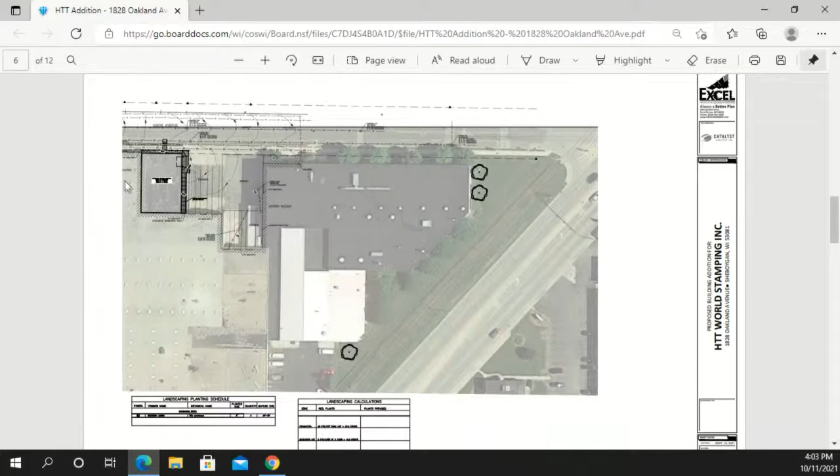Thank you. This one seemed pretty straightforward. Steve? Yeah, I could go through a couple things here. If I could get the screens please, Scott. This is an area where HTT is located on Oakland Avenue. The area you can see with the arrow is where the new addition is. Presently, that area is used for storage purposes.

So this is the area that we're looking at from the building perspective right now, where the fencing is. And that's the footprint of the area that the new structure is to be built on. This just shows that it's going to match up with the existing building. I think the applicant can talk a little bit about its location and why they're going to be there, and if there's any other questions from a material standpoint.

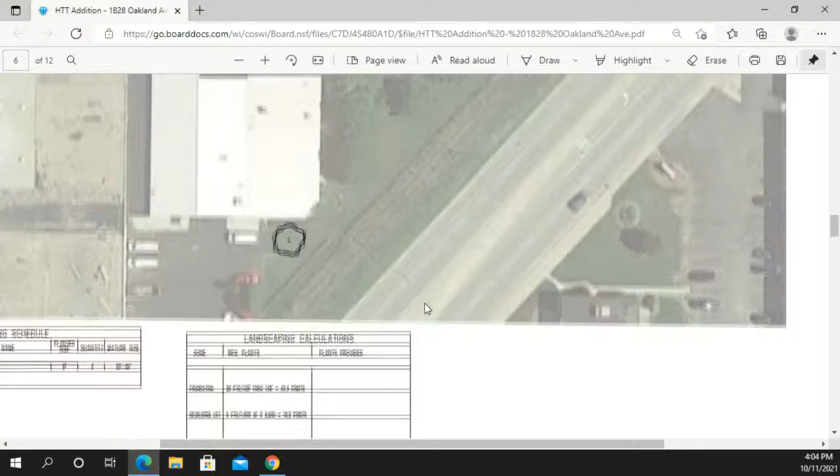I know it looks like it's a different material than the block with the panel, but I think they were doing some things to make it match, and there was a little taller addition they can speak to as well. Yes, the existing is CMU and the new is precast, but we're actually going to use a CMU form liner and match up the grout lines, so from the exterior it will look like CMU and kind of match the existing materials.

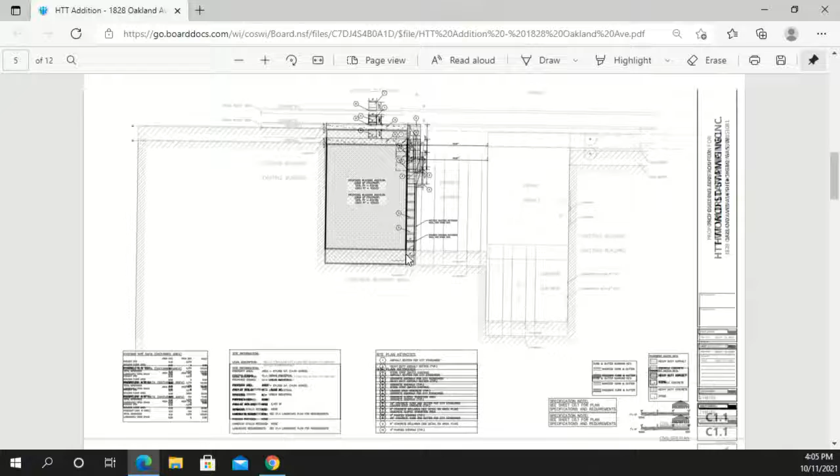As far as the location of the addition, there's an existing crane in the adjacent factory space that's going to eventually extend out into the new addition there and help move equipment and materials out into there. And there's going to be 2 new presses in the new building, so that's why the new addition is actually a little bit higher to accommodate the new presses that you can see on the floor plan there.

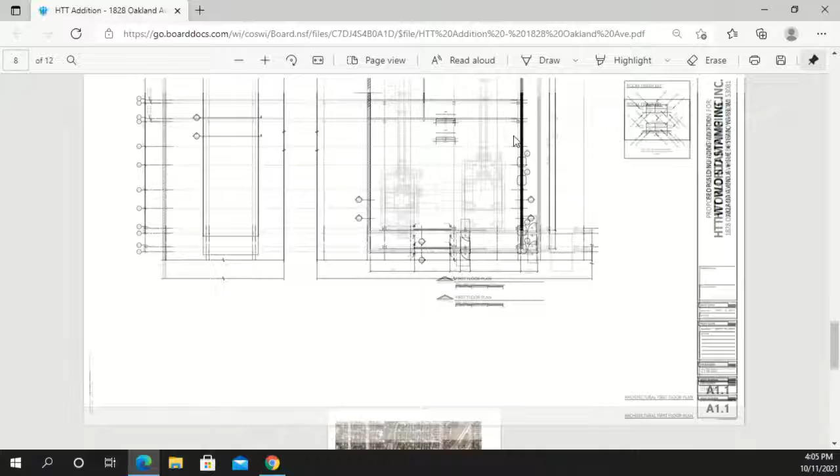And the panelized material on the back faces, what was that? That is painted white insulated metal panel. So that's actually up above on the back side, so it's not really visible. It's just to help insulate the new addition, and is also painted white, so from far away it looks like everything is matching.

And would there be any other mechanicals or elements mounted on top of this roof? I don't know if Mark can speak to that. Yeah, heating and cooling might be up on the roof, but that could also be tucked back on the existing roof potentially and off of visibility.

Typically, any of the rooftop units that would go up there, we would be looking for those to be screened. Okay, so if you could tuck them behind the addition so we can't see them, that would be great. Sure. If they do need some sort of screening, because they're going to be visible on the roof, that would need to come back for at least staff approval on that. Okay, given the sight lines and whatever screening you're using. Sure.

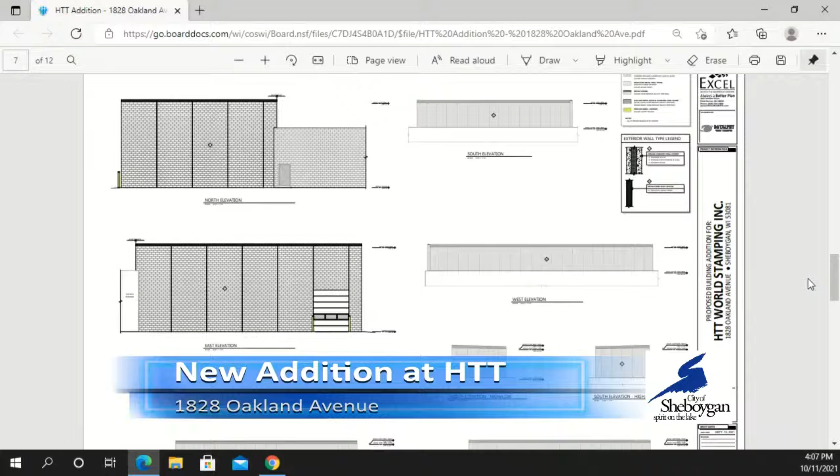Generally, this seemed to be in keeping with the existing building. It's a pretty industrial drive through here. It didn't seem out of place to me. There was nothing else that caught my eye. Any other questions or concerns from the board?

I think you're, oh, I'm sorry. No, no questions or concerns. I go by there every day. It's right by my house.

So I'd make a motion to approve subject to recommendations. Great, thanks, Jerry. We have a motion and a second. Any further discussion? Hearing none. All those in favor signify by saying aye. Aye, aye. Opposed? It's approved, subject to conditions with the rooftop units, reviewing those with staff. Definitely. Thank you. Thank you very much.

Next item on the agenda, 3.3, is the proposed construction of the Phase 2 riverfront condos on South Pier. Paul, I assume that's you. If you could come and introduce your team on that one and tell us what you're proposing for that project.

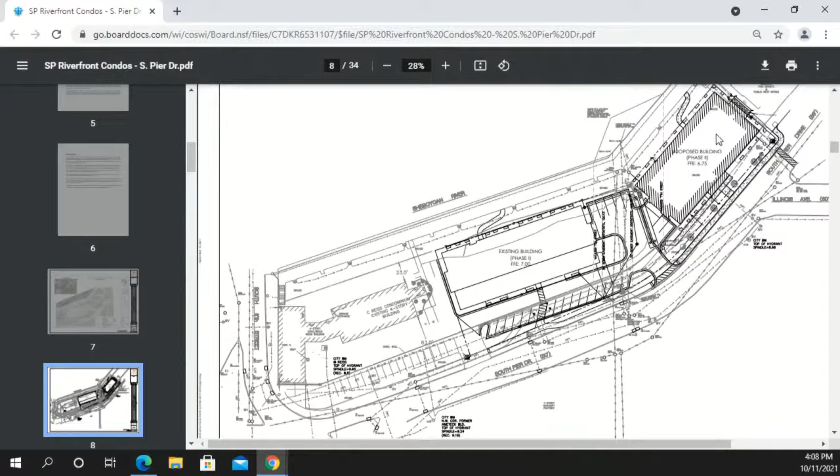Good afternoon, I'm here with Toby, the developer. This is phase 2 of an existing project. Phase 1 is built, a 24-unit, 4-story apartment on South Pier Drive. Phase 2 would be very similar, a 15-unit apartment building, with first floor parking and 3 floors of units above, so 4 stories as well.

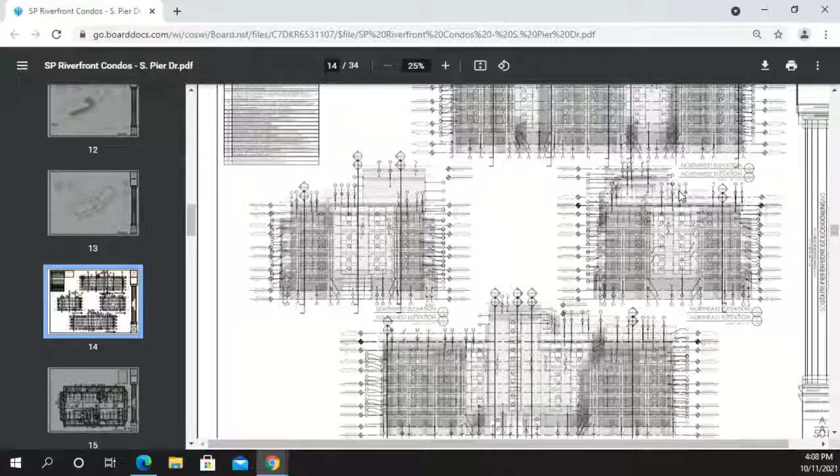We would be matching the same color scheme pretty much that's on the existing building with a slightly different material. The existing building has lap siding and a smart panel on it. We would be on our building going with all LP lap siding. They had some issues with the panel system that's on that building.

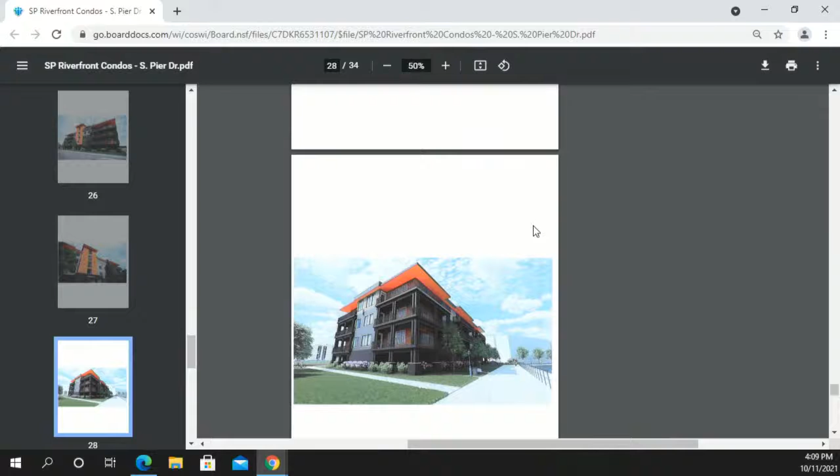As far as heights go, our building is a little bit taller due to taking the elevator up to an occupiable roof. Other than that, it should be very similar. I did bring some pictures here, just because we're having a hard time getting materials. But pass those out, thank you.

It is our intent to use the exact same masonry on the base. I talked with Hein Construction, who got the brick from County Materials, and that brick is still available, so it's our intent to use that exact same brick. And then I also just put in there a view of the exterior of the existing building, so you can kind of see how our new one ties in.

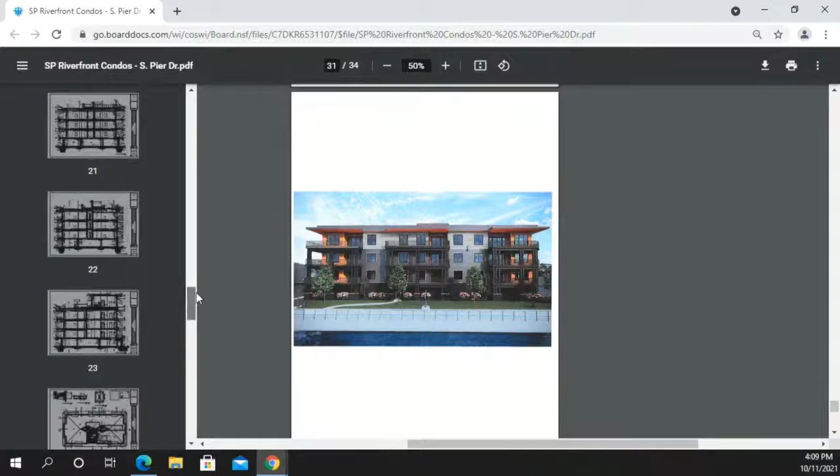We are planning on using the same color grays, taking the darker gray up 2 floors and then the lighter gray on the top floor. The only difference being instead of the panel, we plan on doing that with the smart side lap siding. I did bring a sample of that along, but it's used quite a bit, so everybody's probably pretty familiar with what that looks like.

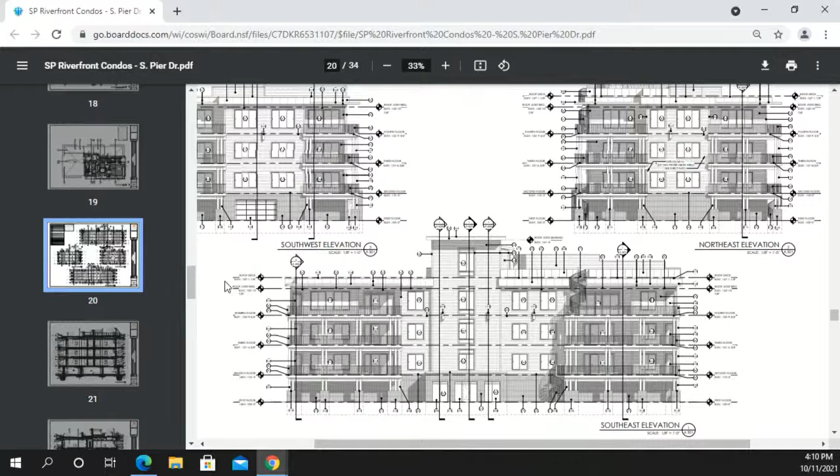I think the existing building's pretty successful, and this seems to carry on the themes nicely. I actually think the lap siding is possibly going to look nicer than the panelized system did. I appreciate the color break for the tiering of the elements.

The only question I had, flagged by looking at the pictures of the existing building, is your vents in relation to your building lighting, making sure that you don't end up having your decorative lighting up against any of those vent elements that are getting punched through. The existing building highlights those in a couple of spots, and up above they're centered, so I don't know if those are casting shadows from the lights. I haven't gone looking for that, but given you've got some decorative lighting elements there, just make sure you don't defeat it by putting in some ugliness. It'd be design build, we haven't gotten into all of that yet, but that's something we'll certainly pay attention to and keep track of as a CA element.

Otherwise, I thought it looked pretty good. I didn't have any other questions.

Did you want to say something, Tom? No, I was just coming up in case there were questions. Okay, specific reasons why we made changes and how we did it. You might want to tell us a little bit about the last ones and that there's interest in this one, just some things from that perspective.

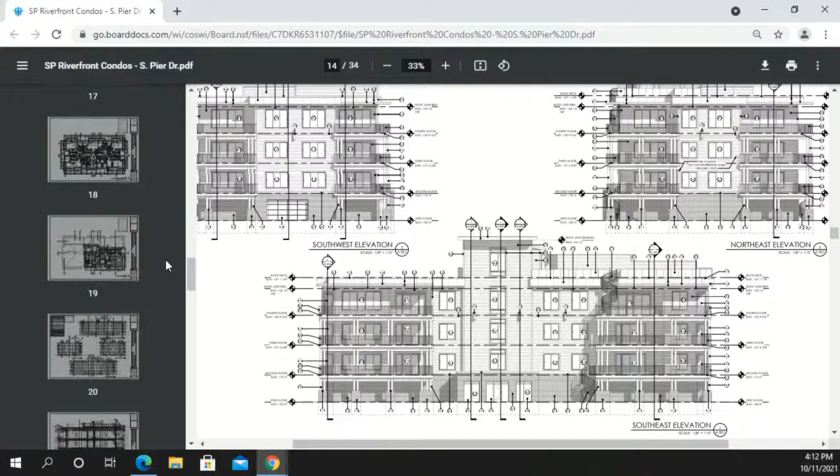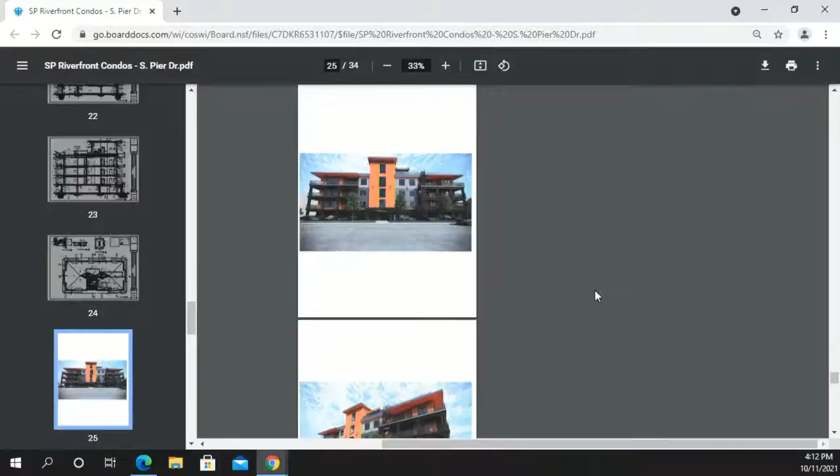Some things we learned from this building compared to the last: having an accessible elevator to the roof for the rooftop area, and wraparound balconies. Our last building had larger balconies than anything else built in Sheboygan, so now we've gone even bigger, wrapping them around the corners. That was a design element people really wanted. We also added garbage chutes, which we didn't have in the last building. Just a lot of little details we've learned from that building.

We're going with Chapa Construction, a local contractor, so we keep it local again. That was one of our challenges with COVID-19 this past year, some supply chain issues and contractor issues, but I think we've got a little bit in the clear from all of that.

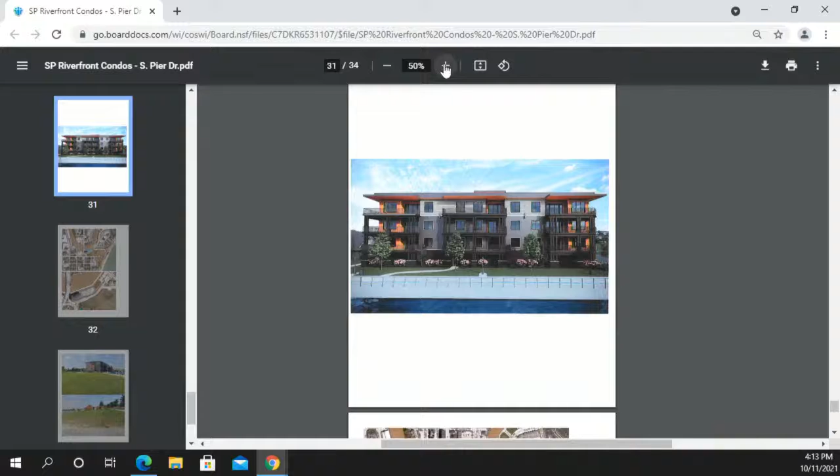And they all sold. In fact, we've had secondary sales now in Building 1, where we sold units for maybe $279,000 and now they've flipped them for around the $300,000 mark. So they've already gone up from what we sold them for. There's been 3 sales so far, and a 4th one coming up. I think we'll do real well on this building too, and the market's going to demand that we keep making them better and better.

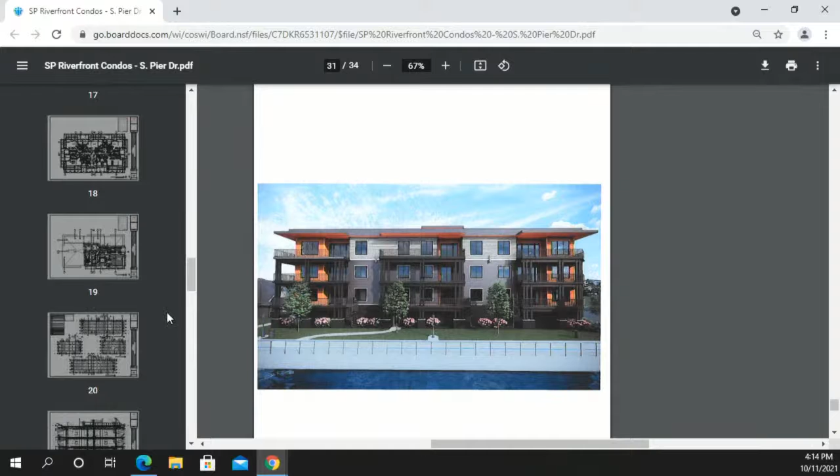So we're adding more glass, better glass, and better siding. You'll notice even in the garage, we've designed a garage within a garage, so penthouse people who want private parking can pull into the garage and still have a garage inside, which I hadn't seen done anywhere before.

Super. I guess there was one other item in the comments, and that was the chamfered corner. What's happening with that? Has that been determined yet?

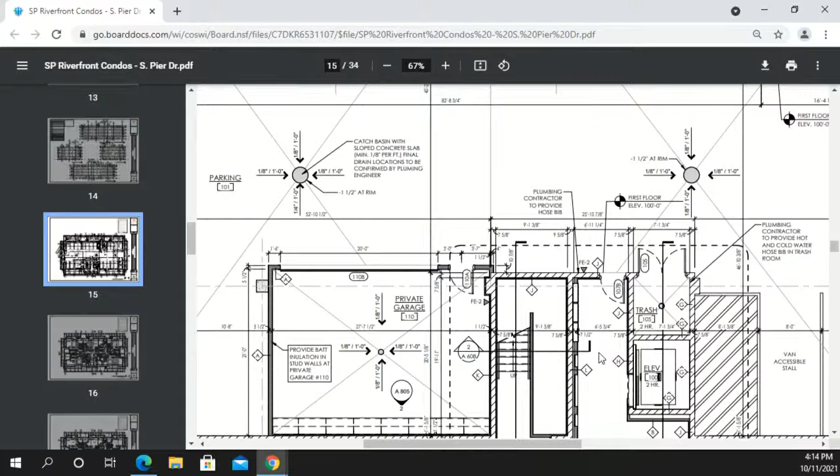One of the things we're working on is a little bit of a property line we've been discussing with the applicant, and we found there are no utilities in there. So the idea was either to allow them to lease that existing property, or if not, to curve or angle that deck in that area. That's still being discussed between us and the applicant, figuring out the best way to handle it, because if there's replatting, there are certain things that need to be done about crossing a property line with a building. So there are a couple things that need to be ironed out one way or the other, which is why they brought both options in.

Marcus has a question. Oh, I'm sorry, which one are you, Mark?

How much property are we talking about crossing over here? I'm going to guess, I don't know it right offhand, but I'd say like 10 foot by 10, a small corner. Can you help me understand where that is? Yeah, yep.

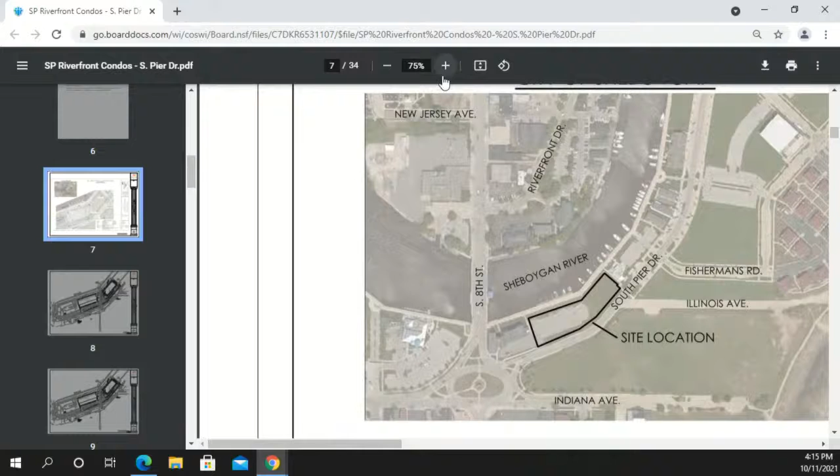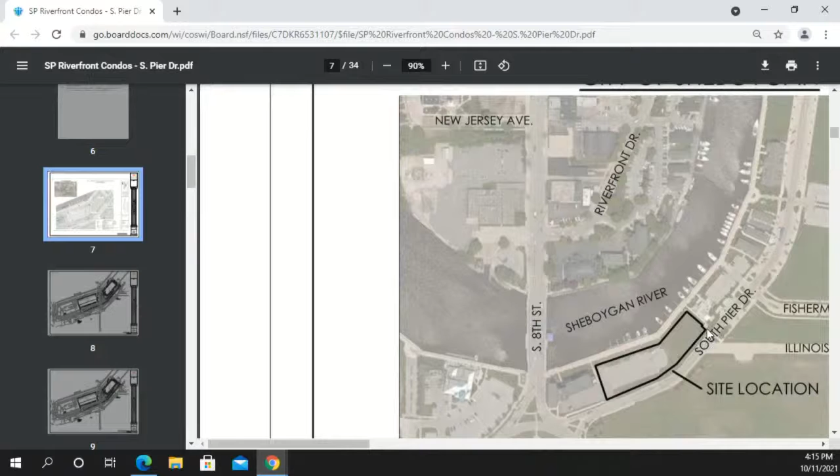So if you look at this site plan, you can see this small jog in this corner right here. That presently is not part of the lease, so the idea would be to just straighten that out instead of having that jog. What's there now? Grass.

I think what happened, and the reason why that little jog was there, is it kind of follows what used to be the sidewalk pattern. They just followed the sidewalk pattern when they ultimately created that land lease and property division for us. Now that we're redoing that sidewalk, it's not going to follow that pattern anyway, and it just makes more sense to square it off and keep the space for the building squared off instead of having a weird angle.

You can see there's a sidewalk on the south side of the fish cleaning station, and then across the street on South Pier Drive, the idea was to have that come straight. That's why that angle is in that area. So we didn't have these discussions, we didn't know that we would be dealing with this situation.

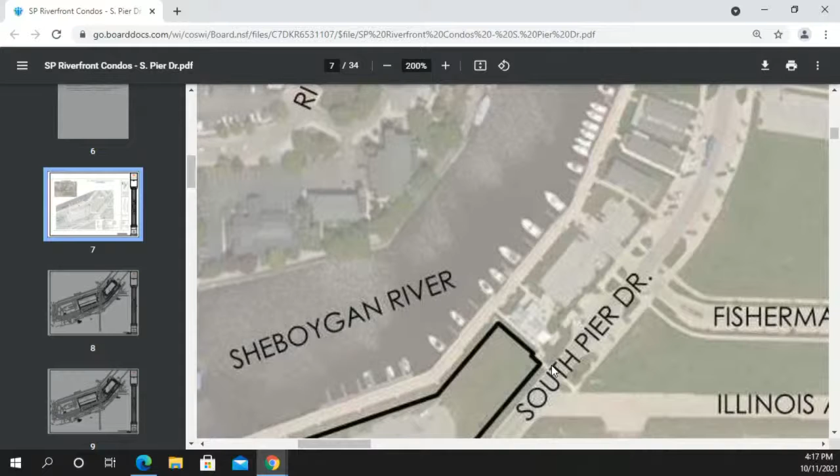So the idea is, hey, let's get them both approved. If we can work on something that works for them, we'll get that squared off and deal with the sidewalk around that area. And there's still room to do that.

Thank you. One follow-up question for the developer. Are you moving to Sheboygan full-time now? Are you going to become a resident with this second phase? I am. Actually, when this is done, we'll be moving down to the top corner floor, that corner right where you're talking about. Fantastic. So, yeah, welcome to Sheboygan.

Bob, last chance to tell Paul to do something different.

No other questions. I'll go ahead and make a motion to approve, subject to staff recommendations. I think a hallmark of this is the last time we were here for the first building, we had about 30 people in the room. This time, zero. So it looks like you did a really good job on the first one. Thank you, appreciate it. I'll second.

We have a motion and a second. Any further discussion? Hearing none, all those in favor signify by saying aye. Aye. Opposed? Wonderful, that passes. Thank you, great, thank you very much.

Brings us to our item 3.4, the proposed construction of the new addition at the Tidy Store facility on 14th Street. If you could introduce yourself and tell us a little about what you're proposing, please.

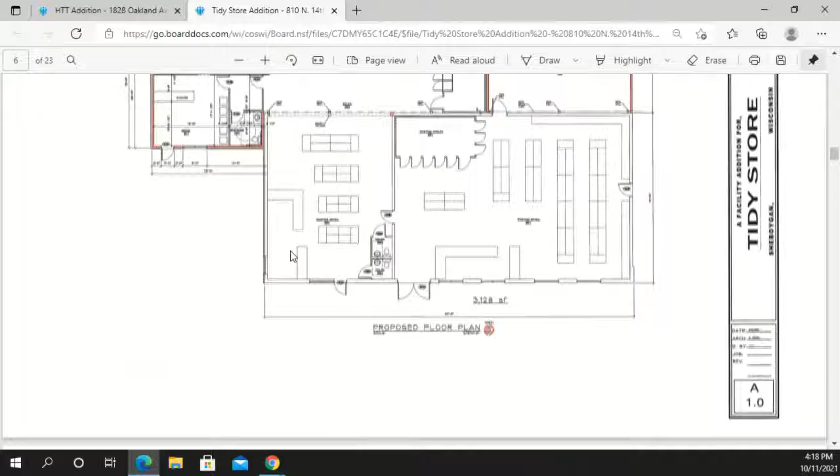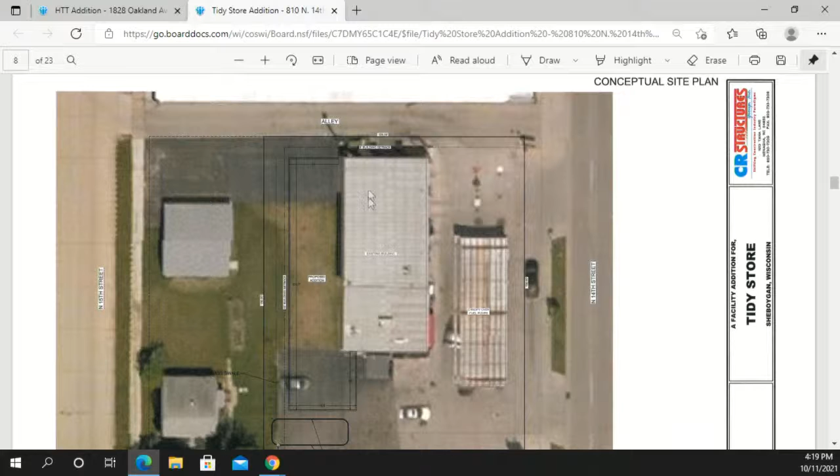Good afternoon, Chad Reichelt, CR Structures Group, here on behalf of the Tidy Store, as well as we will be the design builder for the project. Challenging little project. The owner would like to expand his facility to include additional indoor storage, a small takeout restaurant, and additional beer coolers and frozen food cooler. So the site is currently extremely small to fit such an addition on. However, I think we have a good plan to accommodate both the owner and the city requirements.

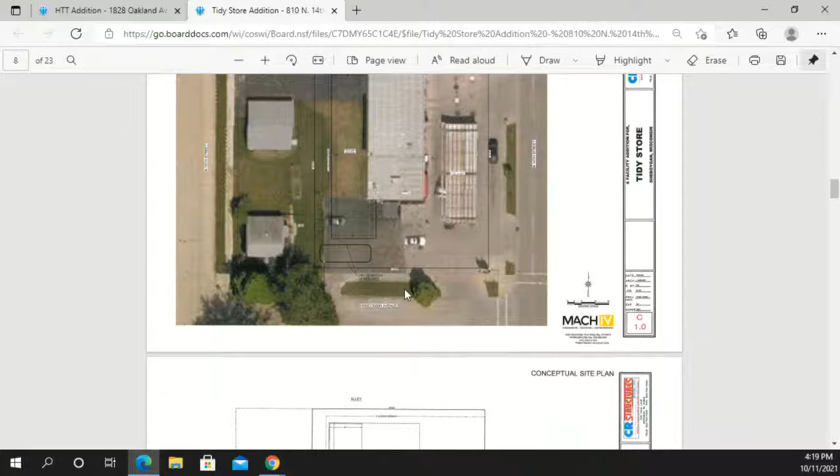So with the addition, we will be bringing in stormwater, new sewer lateral off of the side street, that one on the bottom. Wisconsin, yep. So there will be road patching as part of this project. The existing front facade, we're not doing as part of this project, it's not part of our scope of work. He did redo it three or four years ago. Obviously, we know what it looks like and what the feeling is towards it. Our materials, we're gonna match the existing red masonry, but our material above the red masonry will be EIFS and/or Hardie lap siding. So a combination of those two materials in lieu of the horizontal exposed fastener metal panel.

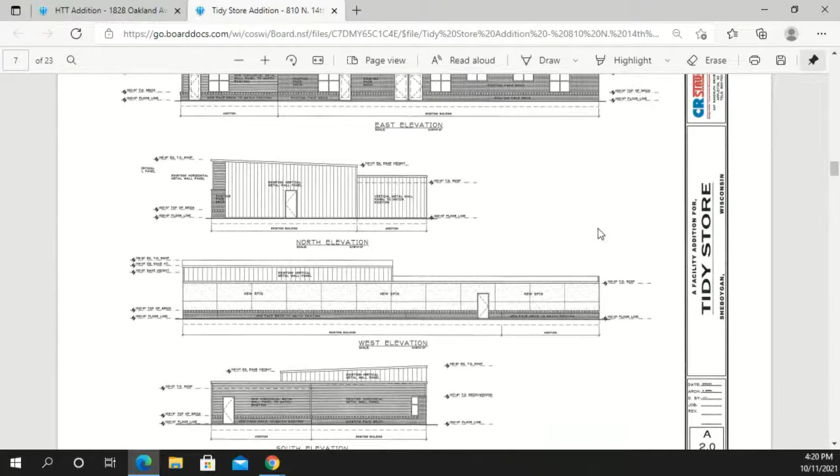Steve, there were quite a few staff comments on this one, do you want to run through your thoughts on those? Sure. I think a couple of the comments, some of them will be discussed at Plan Commission tomorrow, with regards to just the site in and of itself, in terms of just cleaning up some of the things that we thought were gonna take place when the liquor store was getting done with the addition. I think a couple of the questions we had: that west elevation, facing 15th Street, that's gonna be EIFS with a little bit of the wainscot on the bottom. And the question was, with the additions, both north along the alley by Dumas and south along Wisconsin by the residential property to the south, whether or not you wanted to see those areas with the metal. On the north side, they're showing the vertical metal to match what was there, and on the south side, they're showing the horizontal to match what was there. So they're doing all EIFS on the back, and I didn't know whether or not the board would prefer to see what they have, or if they'd like to see the EIFS wrap those two additional elevations. So that was just kind of a general comment about the facility.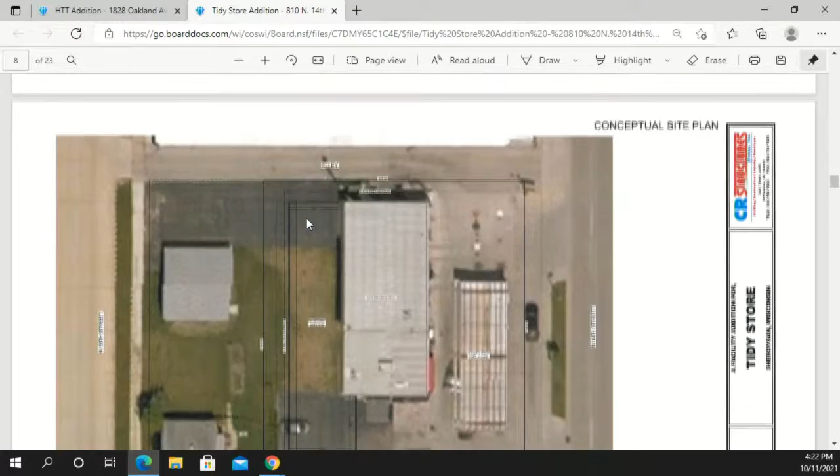Okay, the north side, because it's an alley, I don't think it really deserves EFIS or something that's more expensive than a metal building panel on that side, quite frankly. It's not gonna be seen except for people that drive the alley. Just trying to get that- the home decor store blocks the view of that from both streets that are perpendicular to the alley. Gotcha.

So we would be painting the existing steel to match the new steel, so that whole side will be uniform. We're not just gonna leave the existing rusty steel. It will all be painted, most likely a dark charcoal to match the EFIS, so the EFIS color and the vertical steel siding color will be the same color.

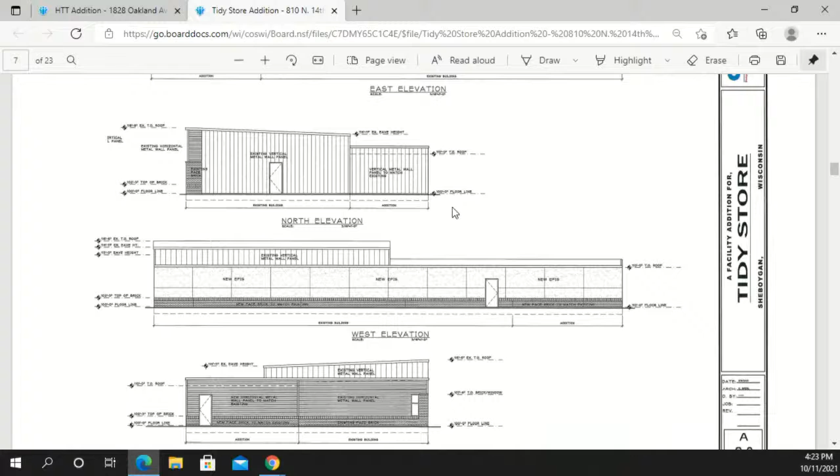So then it really just comes down to that south elevation that faces those residences. I don't know if there's a preference by the applicant. Are you looking for a picture of that south side, Joe? I was just looking for that alley spacing with the decor there, basically the alley looks like that, similar to the south side right now. I don't think I have a problem with the north side panels. Is that it right there? Back up three.

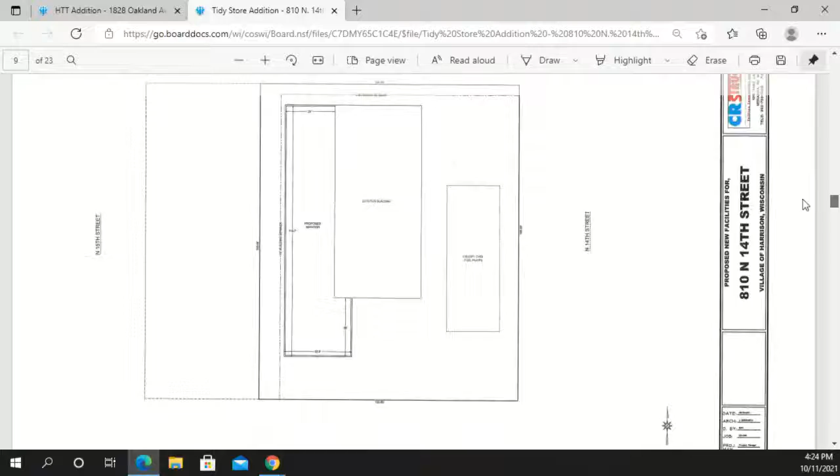Yes, I did have a couple of other detail questions. On the east elevation, at that south end, you're showing your brick wainscot with a soldier course cap to it. And then that east elevation showing a pretty significant setback to your siding above.

That seemed like a strange detail that wasn't showing up at the other transitions, meaning the wainscot masonry on the existing building goes to the top of the door frame, and we're going to the bottom of the window frame. Or, I guess I'm not following that. What I'm questioning is it looks like you're matching the soldier course on the existing building, but the existing has brick above it. You're showing a setback that's more than the soldier course depth, so I'm wondering how that's capped, or if that's just drawn incorrectly.

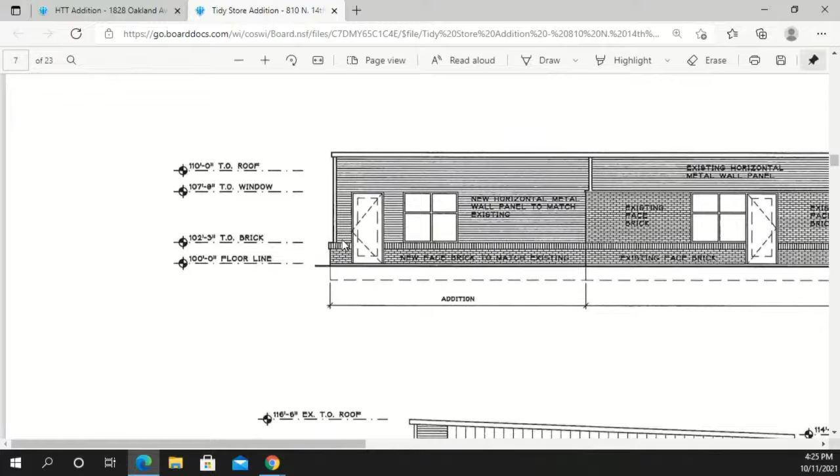That's showing like three bricks of the soldier course projecting out past the face of the wall up above. Can you zoom in on that? I'm sure it's just a graphical error. It would be a traditional soldier course held out a quarter inch beyond the bond.

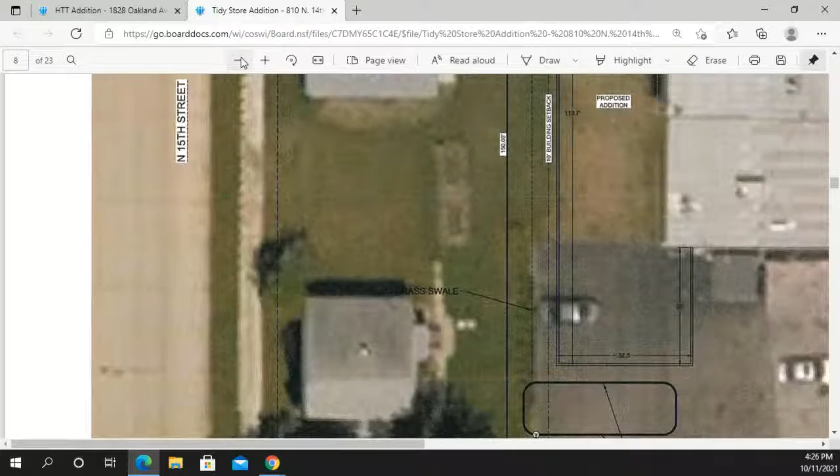I wasn't sure if the existing building had... You're looking for a particular view? I was just looking to see what the transition element was there. So the brick is currently flashing the facade over it; the masonry was basically just put in front of the existing steel. So at that corner, if that's what you're looking for, the southeast corner, the masonry right there.

So that brick is just out in front of the existing gray vertical metal. All the materials were just put on in front of the existing materials. And it does look as if there is a metal flashing over the masonry. So I guess that detail would be similar. We have to do something with the remainder of that wall, so we'll have to match, putting the brick in plane with the existing brick on that wall. But once we get to new construction, it will be more standard means and methods of application and flashing.

And then it looks as if on that west elevation, there's a parapet at either end. Yes, so on the alley side we were not planning on doing a parapet, but all of the addition on the east side and south side would have a parapet, along with a new parapet built on top of the existing south wall to clean that up.

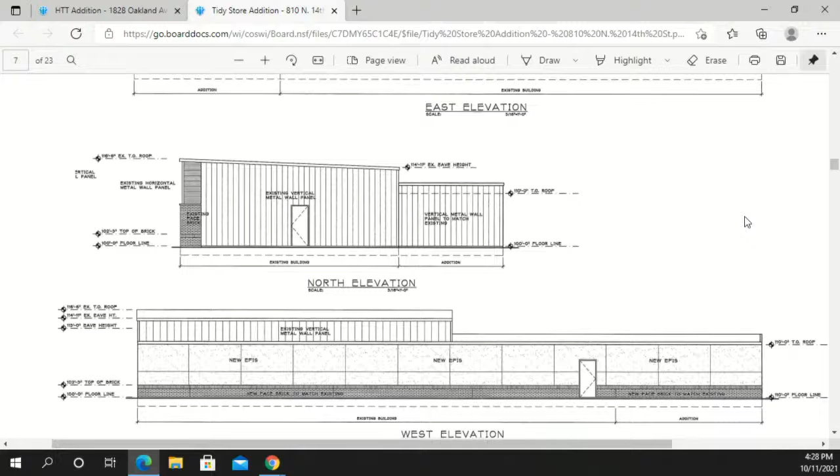On the north elevation, scroll back up to that one, the addition is shown with a horizontal line, drawn as a parapet that doesn't show up in the west elevation. I think these are a little bit older drawings, but that parapet goes away, so we would match the slope of that roof. The intent would be to match the slope of that existing roof on the alley side, again just trying not to add too much value to that alley side and spend it on the other three sides, to be honest.

I've been talking to CR Structures on behalf of the applicant, letting them know that obviously some of that stuff would hold up building permit issuance and different things like that. Plan Commission will probably address some of that tomorrow. Jeff and I have been talking with the others from CR, and they have an understanding of what needs to be done. They've come in with the facades and different things on the west elevation based on some of the redevelopment occurring in that area with the condos and the hotel and things like that, so they've brought in some designs that we thought better address that west elevation.

I'm sure it'll come up tomorrow more in the other meeting, but the fact that that whole west elevation is basically going to be covered by a landscape barrier, which is going to be required to separate this commercial zone property from the residential zone property further to the west, correct? That's correct too. So really, not a lot of that will even be visible once that landscape barrier grows in.

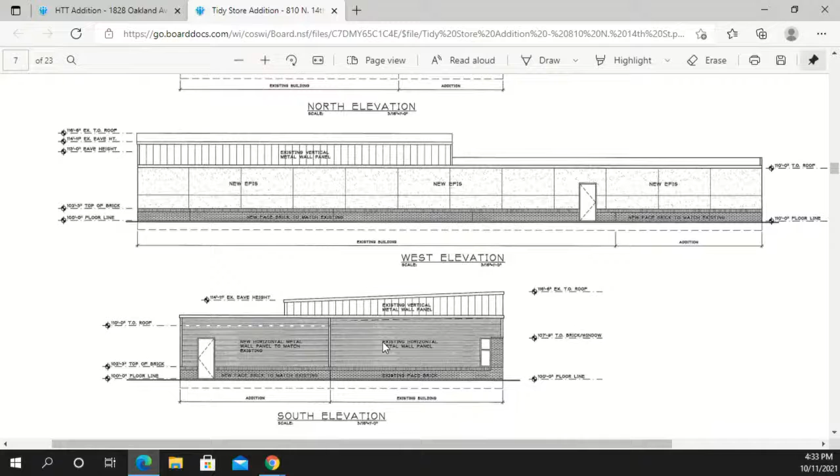Great, a very clear motion, thank you. Any further discussion? Hearing none, all those in favor signify by saying aye. Aye. Opposed? Motion is approved, subject to those staff revisions.

Good luck, buddy. Great, thank you very much. Yep, see you tomorrow.